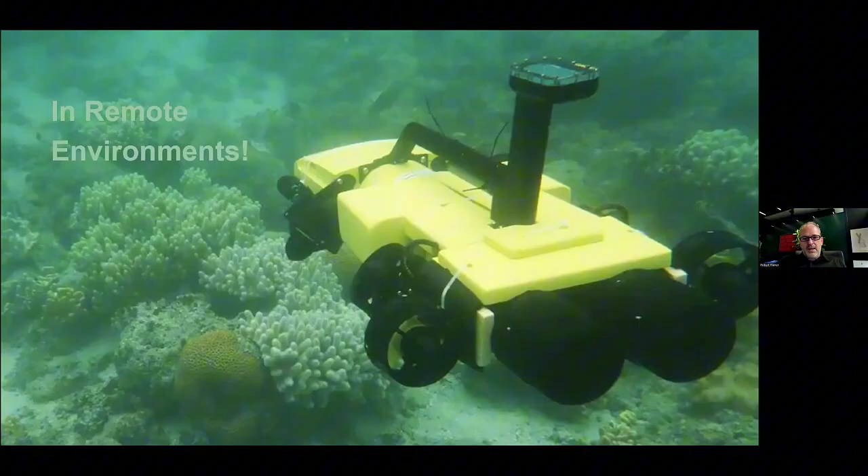We for sure can say that robots do outperform humans in remote environments, such as on the Moon or Mars or in the deep sea, because these are areas where we maybe do not want to go, or we are not able to go because of the missing atmosphere or the high pressures.

But the question is especially interesting when we compare human environments. If we have robots that can outperform us so much that they can really help us or replace us in our own environments. So, some of our robots which are successful, like the Roomba robot for vacuum cleaning, or robots for cutting the meadow in the garden.

But they might outperform us for the task of vacuum cleaning because they're able to go beneath the bed and they're reaching areas which we cannot reach. But they're only outperforming us for vacuum cleaning tasks. They cannot cook for us, neither can they transport something into my car, and so on.

So they have a missing versatility. So they cannot do too much. Of course, there's a spelling error, versatility.

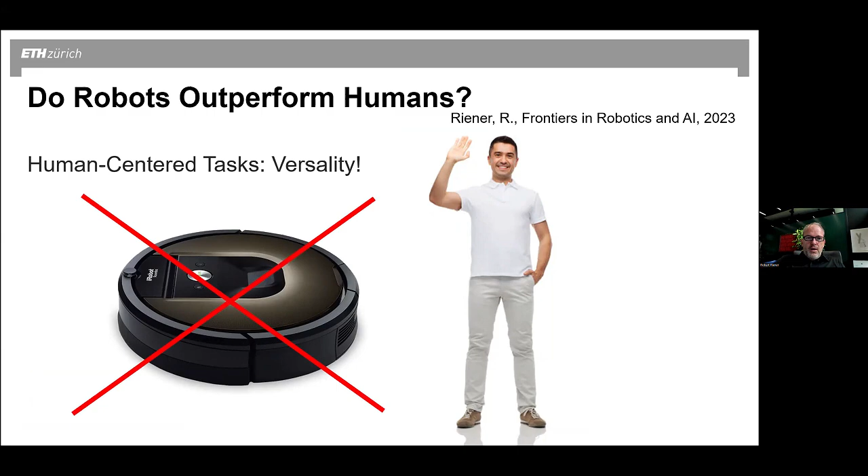So the robots we want to have in our human-centered environments need to have certain properties. They must negotiate on rough terrain, maybe in the garden, or be able to walk steps. That's why probably it's better to have legs rather than wheels. Furthermore, they should fit through narrow spaces, for example through doors or through crowds of humans. So they should have a slender appearance, not flat on the ground, but tall on the standing.

They should be able to reach to tables or shelves just to oversee them with cameras, but also to interact with them, to grasp objects, for example. They must also be able to perform work, so passive walking machines are not satisfactory. They need to be able to carry objects from A to B. And that's also why we exclude flying machines, because their payloads are maybe too little for many of the tasks we need to do in our daily life environments.

They also must have fingers and arms to be able to perform manipulations. At least the robots we were investigating should have a possibility to be added by arms and fingers so that they could do additional tasks. And they must be able to perceive the environment, of course, not only to control their own movement, but also to understand the problem, to understand the context.

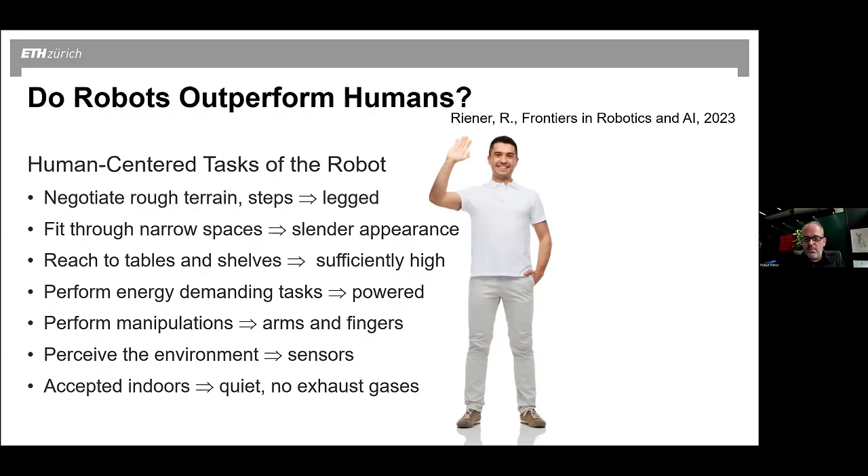And that's why, of course, we need different kinds of sensors. And since they should also work in indoor environments, they should be not too loud and not produce exhaust gases as we get them from combustion machines. That's why we end up automatically with humanoid robots.

If you want to compare humans with robots, we don't need to compare only humanoid robots. But if you speak about humans and robots in human-centered domains, then we end up with humanoid robots, which have similar shapes, anatomy like we have.

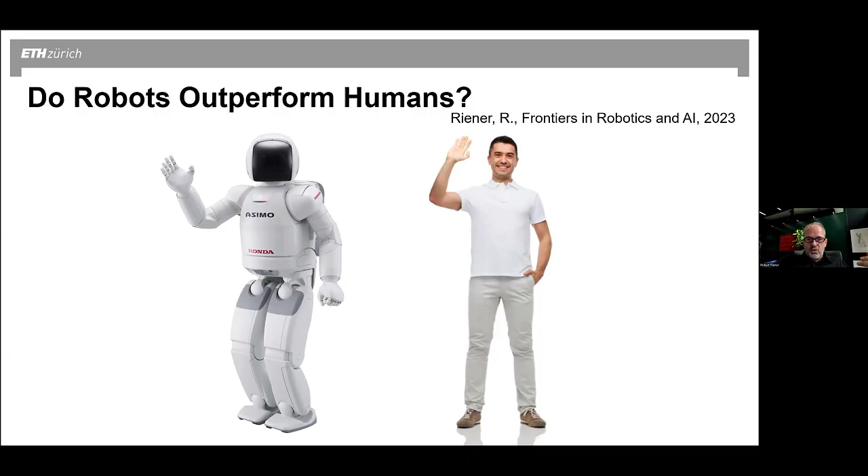Now, the next question is, what do we want to compare in detail? We can compare functions, which humans do - are they able to be done also by robots? But we can also compare structures - are the motors better? Are the joints better? Are the sensors better in the robots compared to the human?

What we did in our study is we did compare both. But then the question is, there are some functions in us which do not make sense maybe to be compared. For example, the fact that we are aging, that's more of a disadvantage.

So we exclude that function, for example. The feeling of emotion, that's maybe something too complicated, so we excluded that in our study. And also the fact that humans can reproduce is something we exclude. We don't want to develop a sex machine. So we want to develop robots which help in human-centered domains for mechanical tasks.

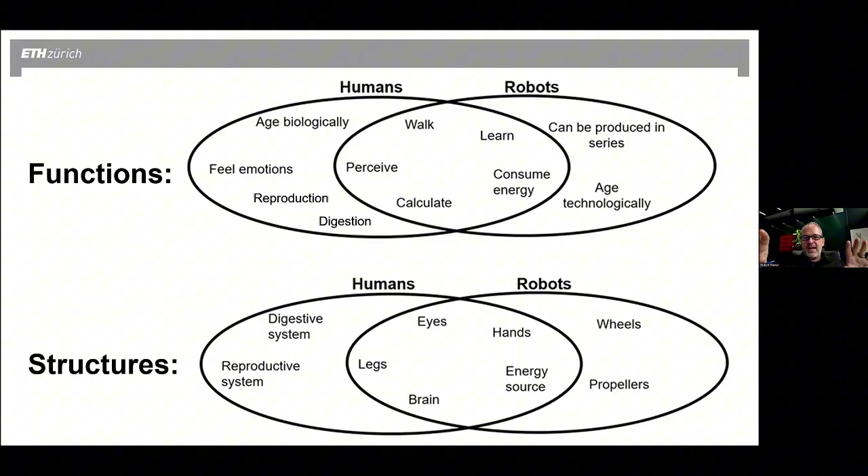And also the aspect of digestion is, of course, very important for us humans, that we can eat, and that gives us power. But in robots, the charging works in a different way. The robots don't need to eat or drink, we just need to charge them. That's why we also exclude such aspects. On the robot side, we also exclude how they are being produced, and how they are aging from a technical point of view.

So what is remaining are functions which are supportive for our daily life activities, which includes walking, learning of movements, calculating to process sensory information, for example perception. But besides walking, we have many other mechanical tasks, such as grasping, such as manipulating objects. And all of this consumes energy, that's why it's also important to compare between robots and humans.

With the structures, it's a similar problem. We exclude the digestive system, the reproductive system in humans, and we also exclude propellers and wheels on the robot side, with the argument as before, that we want machines which are able to interact with humans in human-centered domains. The leftovers are then structures such as eyes or cameras, hands, legs, the brain or computer, and then the energy source.

Now, the study we did is already some years ago, so we included all robots which were known at that time, or most of them. Some of the famous robots we have nowadays, like the Optimus from Tesla, we did not include in that intensity as these machines you see here. This is just a sub-choice. We have found more than 30 humanoid robots which made sense to compare, the newest ones but also some older ones. Here you see some of them.

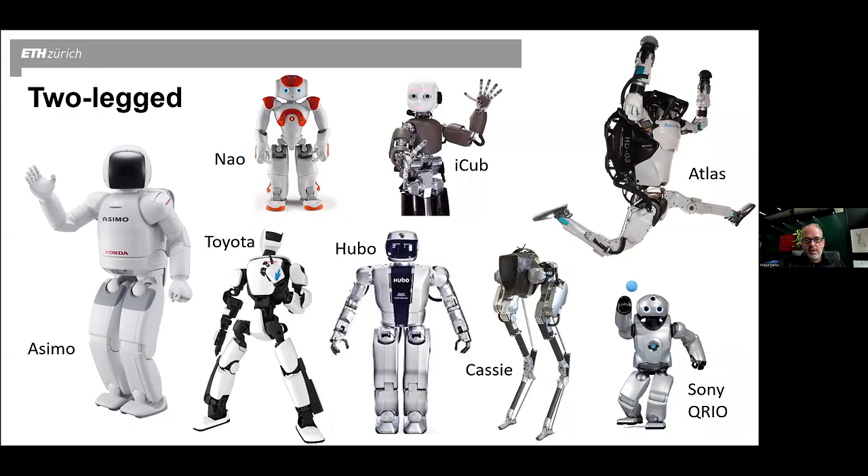Here you see some well known robots, like the Atlas, or the Asimo from Honda, Big Dog from Boston Dynamics. The maximum speeds we could find in the literature or technical data sheets were up to about 2 or 3, maybe 4 meters per second, that's about 12 to 14 kilometers per hour. That's a good performance for these machines, it's amazing how well they can walk nowadays. If you take a human jogging, it's always faster.

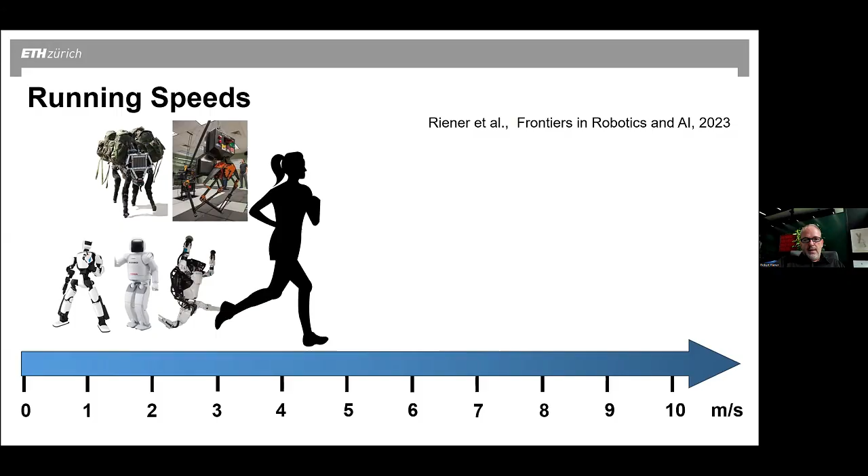However, there's one robot which is outperforming the other robots, that's the MIT Cheetah. It can run up to about 6, 7 meters per second, so that's more than 20 kilometers per hour. It's faster than a human jogger, but if a human is sprinting, you don't even need an Olympic star, just a normal, less athletic human sprinting is faster than the fastest legged robots we have nowadays.

Now, this is just the absolute numbers of walking or running speed which we found. It could be an unfair comparison if we don't normalize by some important denominators. Imagine a very, very big robot, as large as a house, and if you're able to power it, it gets very heavy and large, but such a robot probably has an easy job outperforming us, because if it just takes single slow steps, and one step is like 10 meters wide, it can outperform us easily, but at the cost of size and weight. That's why we normalized these functions of walking, running, and others using denominators: energy consumption, operation time, size or volume, and mass.

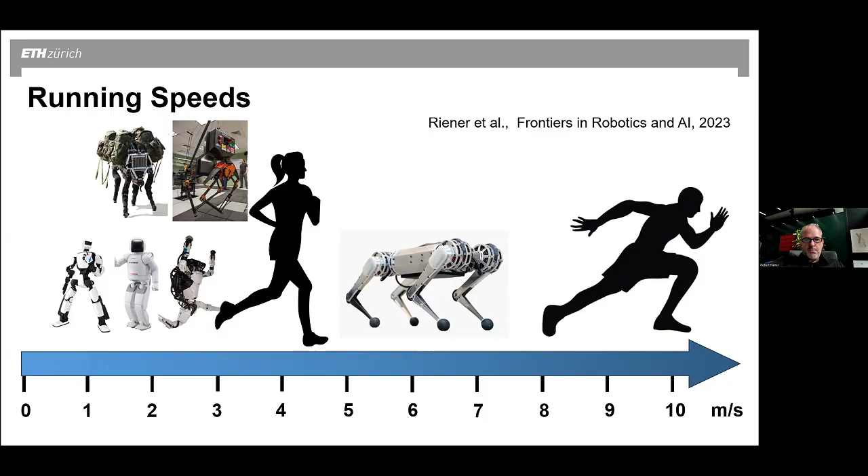However, if you take again the human athlete, then we can say it's about in the same range when we take the speed and normalize it by the mass.

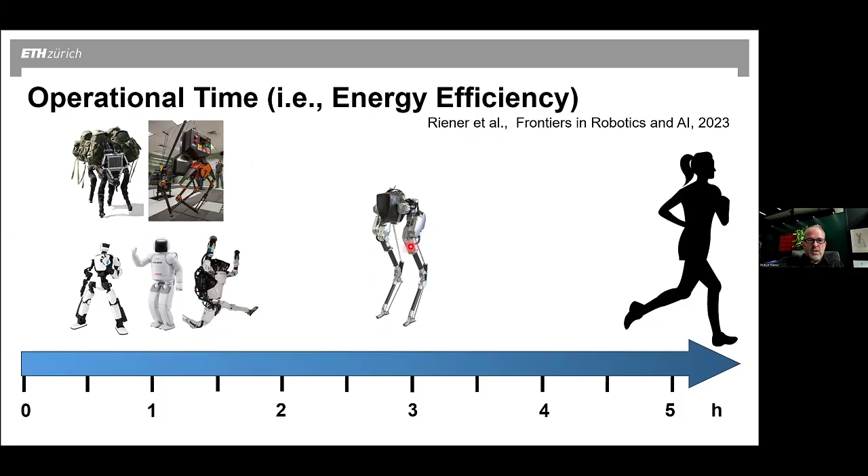Other functions. There are robots which have been developed to do tasks like only jumping or swimming in water, crawling on ground, grasping objects, manipulating objects, driving a car, making a backflip. And in most of these tasks, the robots do not outperform the human.

Of course there are some amazing tasks, like making a backflip, the Atlas robot, the old hydraulic one. Or lifting objects, maybe, there's some robots which are very strong. I would say at least as good as athletic persons. But I would not say that the best robots do outperform the best humans, which are maybe athletes.

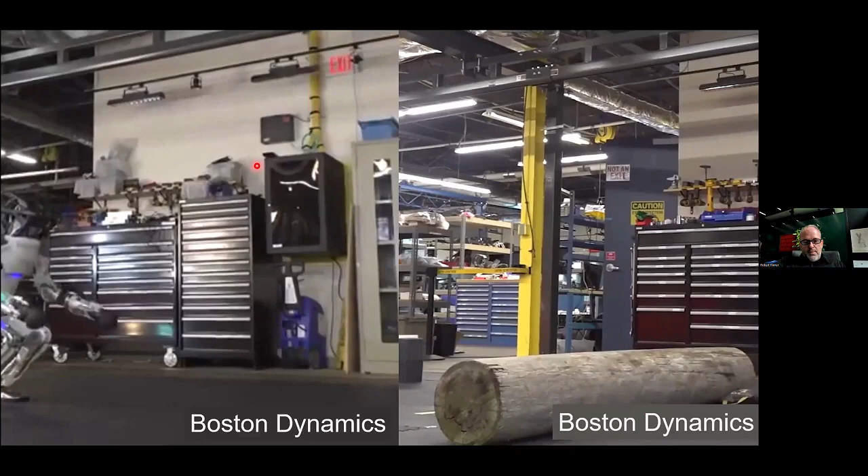You know, probably these movies from the old Atlas robot, that movie is maybe 4 years old. It's amazing what the robot can do, but again, the versatility of humans is not there.

And humans, the best humans can also do this. And what we know from Mark Raibert, who admits this himself, is that it takes some trials to get these movies. The movies are, of course, not fake, but it might need some maybe 10 repetitions to get it like this. And you have a team of engineers behind tuning the robots.

Now let's see with the structures. To summarize the function, I would say there are some robots which are as good as the humans, as average humans, but just in single tasks.

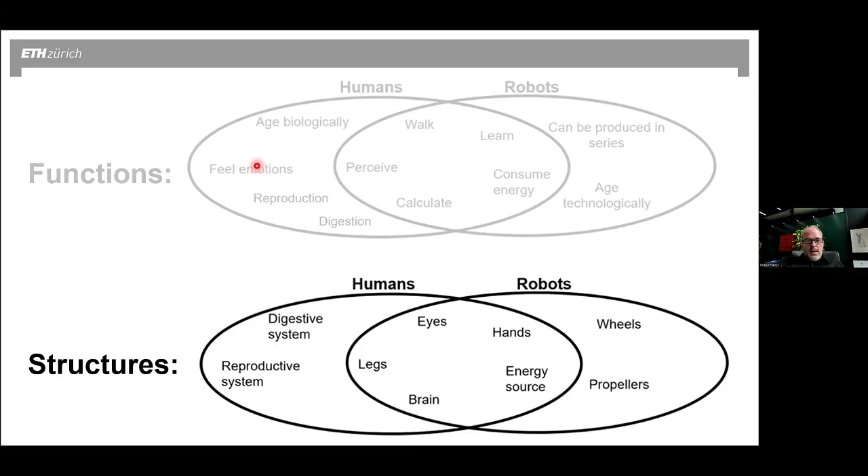What about the structures? Motors, for example. If you take characteristics such as power density, here we also normalize by mass, that's why we speak about power density, also force density, energy efficiency. Then we can say that there are motors which are outperforming the human already.

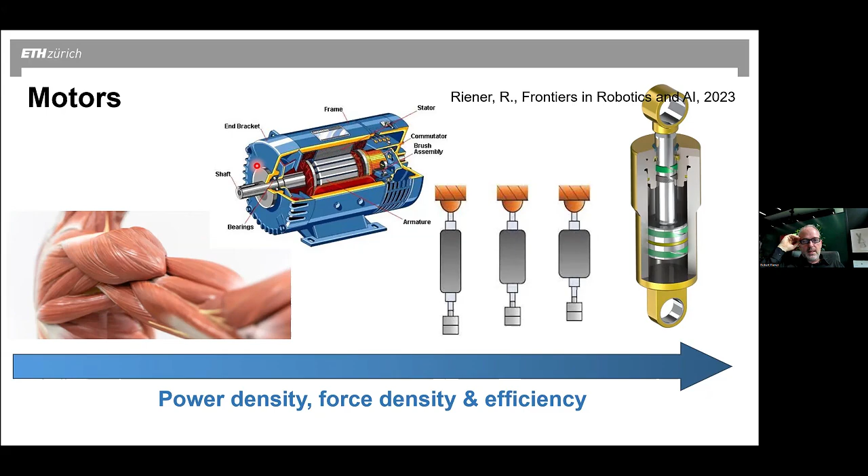There's a little but. The but is that some of these actuators, for example the fluidic ones, pneumatic and hydraulic ones, they are tethered. They are cabled with tubes, hoses, for the supply of pressurized air or pressurized oil. And often the energy or the pressurized liquid is outside of the robot, that's why they are tethered. And also the compressor in the hydraulic ones is often outside, far away from the robot. Then you can make the mass of the device quite reasonable. With Atlas, we have everything on board and it still has a quite good power to weight ratio.

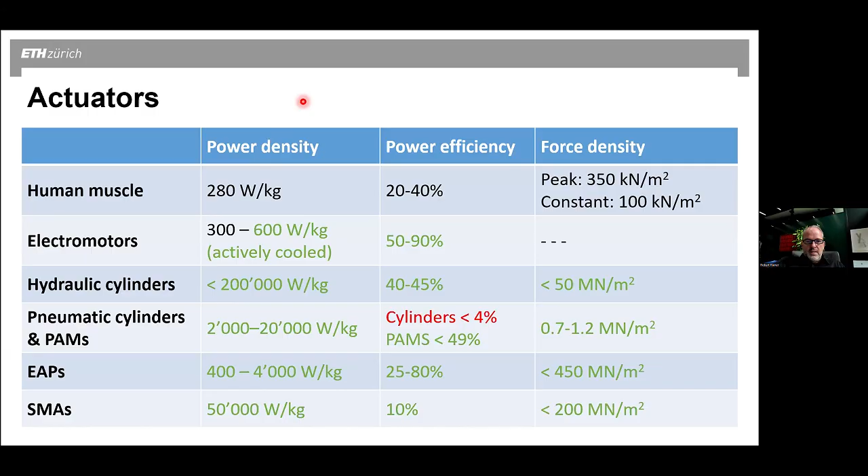In more detail, you see here some numbers of the human muscle: power density, power efficiency, force density. If you take electromotors, hydraulic cylinders, pneumatic cylinders, electroactive polymers, and shape memory alloys, we see that most of the parameters or characteristics are better in the machines, all of them actually, or almost all of them. In pneumatics, the efficiency of pneumatic cylinders is not so good because they have a lot of friction. So the muscle is also not so good, 20 to 40%.

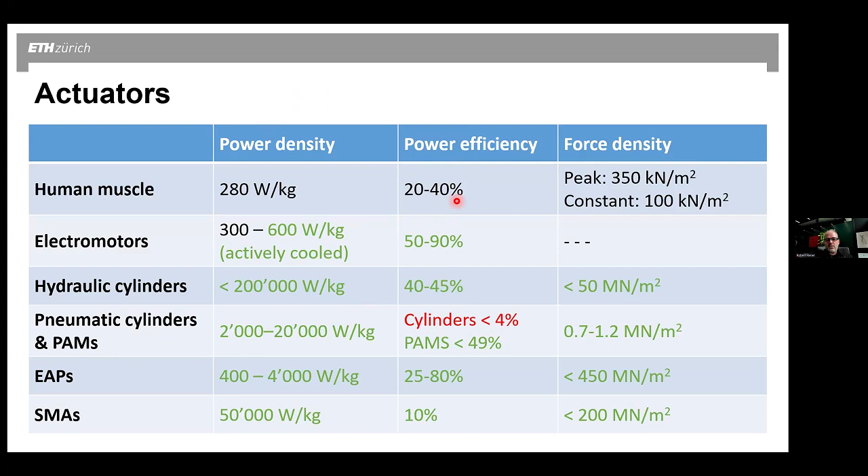But electromotors or hydraulic cylinders do outperform the human muscle with respect to power efficiency. So with motors and actuators, at least when they're tethered, they easily outperform human muscle with respect to these characteristics, of course not with respect to self-healing or such stuff, which we excluded at the beginning.

What's about the materials and the strength, breaking strength, elastic properties, weight in relation to the weight? Here, the bone is amazingly strong, but in the meantime we have materials like carbon, which have a better strength to weight ratio.

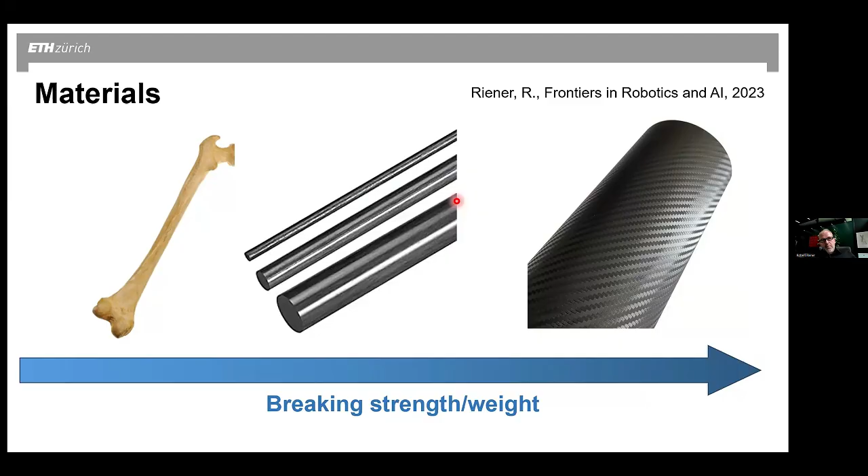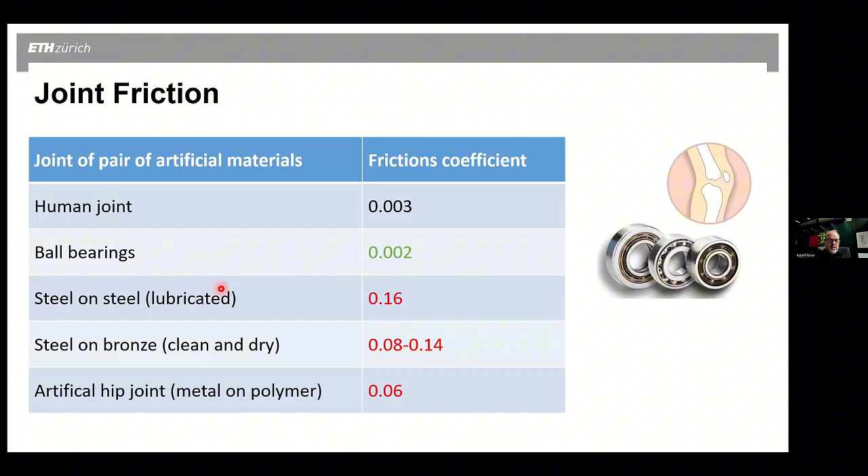What's about joint friction? Human joints are very nicely lubricated with some liquids. Friction is rather low, thanks also to special pairing of different materials, the cartilage in the joints for example, including the lubrication. But ball bearings are better than human joints. Other bearings, friction bearings, are usually worse than the human joint, but the ball bearings easily outperform human joints.

What's about motion sensors, such as to measure joints, joint angles, sensors to measure speed and accelerations, such as done by IMUs, and force sensors to measure forces, torques, but also pressure. Here we have a large choice of many different sensors which are commercially available, many of them, and they're easily outperforming the accuracy of our human sensors.

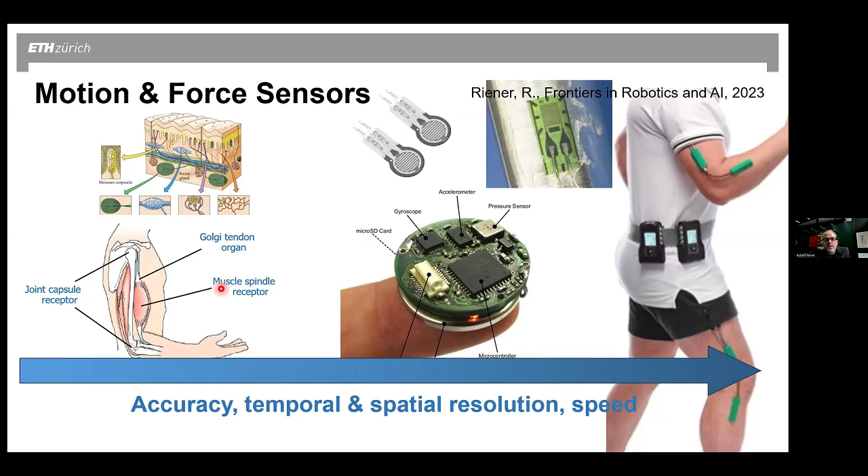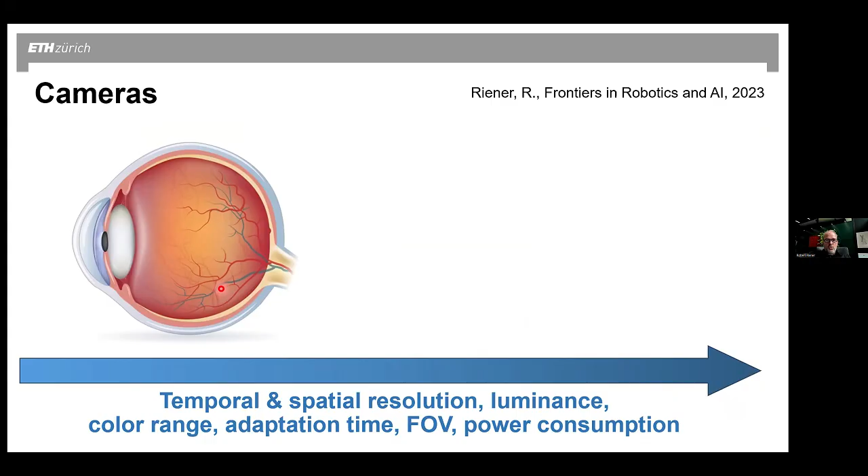Cameras, that's an exciting, although a bit complicated aspect, because there are many characteristics which we can compare when we take a technical camera and compare it with a human eye. And you see, when we combine conventional CCD or RGB cameras with event-based cameras, if you take both of them, then I can tell you we can even outperform the great human eye.

What's about power, computational power? Of course, if we take terms like intelligence, human intelligence, our ability to solve problems, to adapt to new situations from our cognition, that's very difficult to outperform by a computer. But using a computer to control movement, complex movements, I would say with respect to computational time and memory storage, the computers are outperforming the human brain easily, at least if you take a big computer or a cloud of computers.

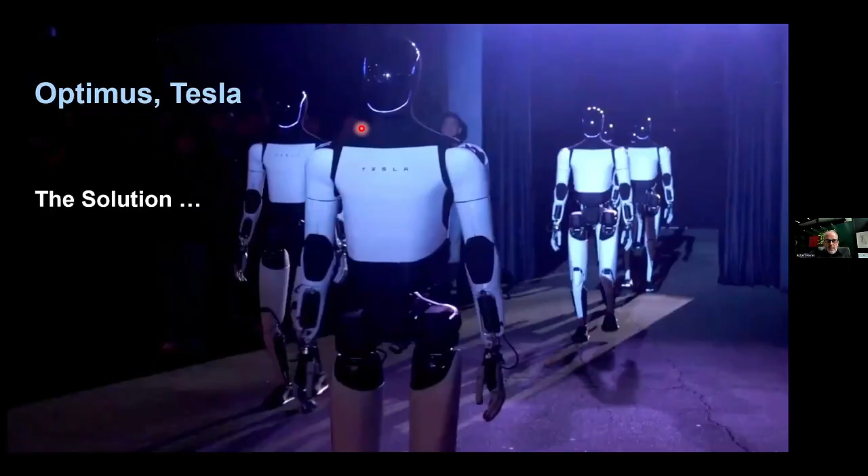So in the last months, we saw great movies, and I'm watching social media. About a year ago, there were first movies from the Tesla Optimus robot, and now just recently, some days ago, we saw other great movies from the new Atlas from Boston Dynamics. It's amazing how well they can perform, what kind of motor tasks they can do, including crawling and making different kinds of jumps. But when you look carefully, for example at the latest movies from Tesla, as an expert I'm still not convinced. I think it's still just hype.

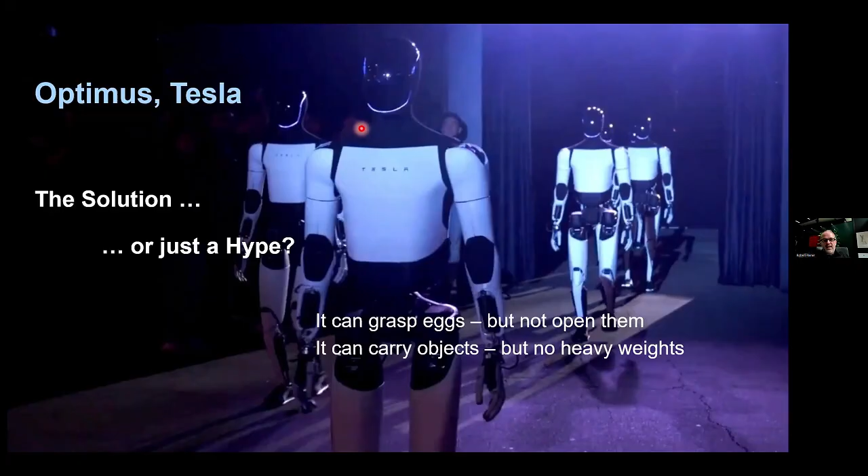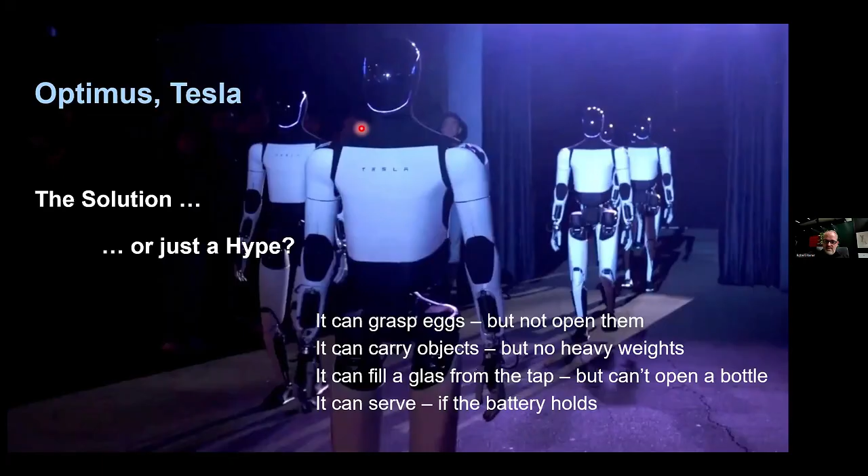I saw some movies where Optimus is grasping eggs, but I didn't see any movie of the robot opening the egg and putting it into a saucepan. The robot can carry objects, but it looks a bit shaky, and the objects look lightweight. I don't believe they are carrying high weights. Furthermore, they can fill a glass of beer using a tap, but I did not see any robot yet taking an opener and opening a bottle with a little crown cap. And they can serve humans, but only as long as the battery holds. Maybe after one or two hours they're useless, or they have to get recharged and aren't available to serve me. So that's why I'm still very skeptical.

To summarize, robotic structures in general are already better than human structures. That's amazing. However, somehow we as engineers were not able to make a systematic approach to combine these structures in a way that we're also getting better functions. That's a bit surprising, and I believe it's just a matter of time to make the robots better.

What we need is to include better motion intelligence. We have to do better controlling and learning of the robots. Reinforcement learning is, of course, something very potential.

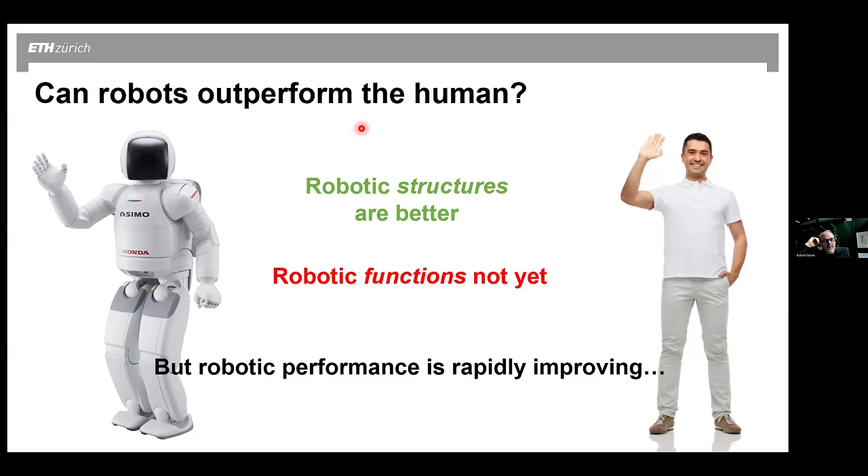We have to optimize the size and the arrangement of the structures to put everything into a limited space. And that's why I'm not too pessimistic. It's a matter of time, and I think it doesn't take too long that the robots will outperform the humans because they're getting better and better. But it takes more time than many people, at least the lay persons, believe. I still think it takes 10, 20 years maybe.

Okay, thank you. Thanks a lot. Thanks a lot. That's a really exciting talk. Yeah, we have a couple of questions from the audience, and then also I have a question to start.

So yesterday we talked about smart bodies for robots, especially intelligence of hardware, like robotic hardware, intelligent robotic hardware. So in your opinion, what are the main bottlenecks in the robot hardware to develop robots that outperform humans?

I think the hardware itself is not bad already. I mean, if you just take the main components like motors, sensors, the mechanical links, joints, they are great to solve specific problems. And we are able, as engineers, computer scientists, and biologists, to place hardware in a way that they solve one task. But as soon as we have a collection of tasks to be solved, the arrangement of the hardware, but also the control using control software, is getting much more complicated. It's magnitudes of higher complexity. And we somehow fail to solve it.